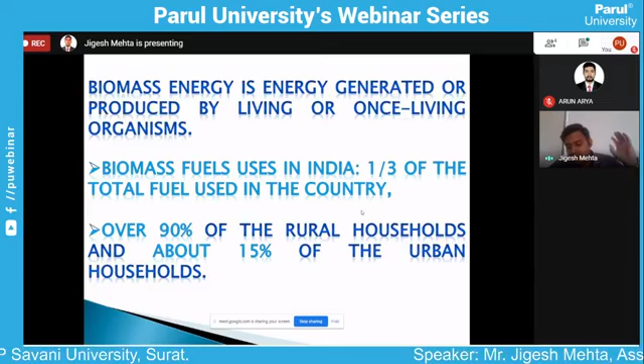This is the way the country or our government is trying to push alternative sources of energy. In India, only 1/3, or 35%, of total fuel is from biomass. Still, this number is very big. But we want to convert it into a 100% alternative fuel use country. Over 90% of rural households and about 50%, or actually about 15%, of urban households use biomass energy. So this is what the statistics currently say.

Now let us define, students, what is biomass. Till now what we discussed was just information or some statistical data. But now we want to know actually what biomass is, because some students from second year or third year may not have even heard this term before.

Biomass is a material derived from plants that use sunlight to grow, which includes plants and animal materials such as wood from forest, materials left out from agriculture and forestry processes, and organic, industrial, human and animal waste. So basically biomass is material derived from nature - the waste or residue of animals and plants, the left-out material of agriculture, the left-out material of forest products, even human and animal waste. If we put all this together as raw material for some source of energy, we call it biomass.

Biomass can be considered a renewable energy source because plant life renews and regenerates itself every year, as in the example of grass - if you cut the grass, after some period of time the same grass will grow again. So it is a natural process. The raw material is available freely in nature; you just have to utilize it and produce some useful product from that.

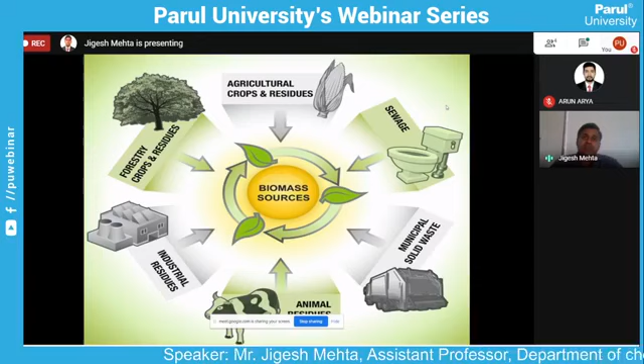Now, biomass sources - how biomass comes from nature, as we already discussed. You can see, agriculture crops and residue are a source of biomass. Forest crops and residue also provide biomass. Industrial residue, from the industry point of view or industry waste, sometimes gives biomass sources. Even animal waste, like cow dung, is a good source of biomass. Then municipal solid waste and sewage waste. So this diagram gives us an idea that biomass sources are available everywhere in nature. It is us human beings, or specifically we chemical engineers, who need to focus and try to utilize these sources for manufacturing renewable sources or fuels from them.

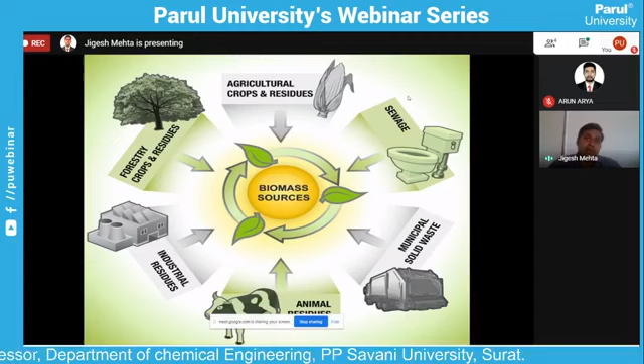Now the energy, sometimes we call bioenergy. The energy content in the biomass originally comes from the sun. Through photosynthesis, carbon dioxide in the air is transformed into carbon containing molecules that we call sugar, starch or cellulose in the plants.

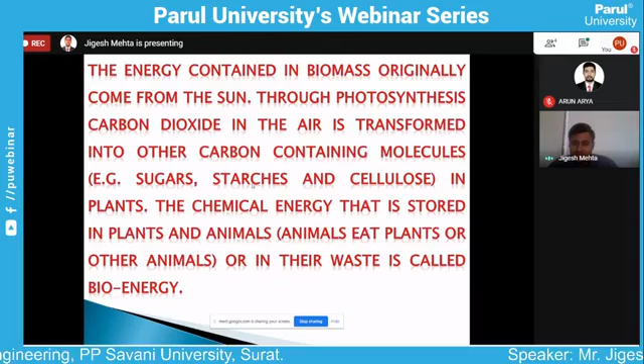Students, please note that whatever cellulose, hemicellulose, lignin, starch, all these chemical compositions available in the biomass, the only source is the sun. Through photosynthesis, carbon dioxide is getting transferred into various carbon containing sources. So it is not some rocket science that biomass contains all these things. It is actually the natural product available with the help of sunlight. Photosynthesis process goes on and the carbon dioxide present in the air gets converted into important sources required for the production of further bioproducts.

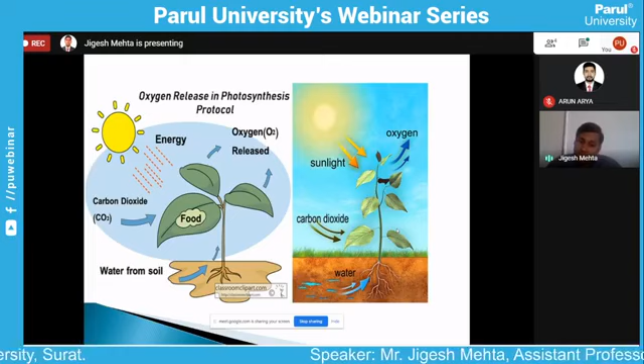What we discussed right now, this is just a schematic diagram for that. You can see the sun is there, providing some energy. Whatever carbon dioxide is available in the air, converts the material into various sources. You can see the uptake and intake of carbon and oxygen from this plant. Oxygen is released in the photosynthesis protocol. So carbon dioxide is taken in by the living trees or some crops, and it generates oxygen back outside. So this is the schematic diagram for that.

Now let us discuss more on the source of biomass, because you are all second year, third year and final year students, and probably in the next one year you will be searching for your projects. So if you know the source of biomass, you can easily start your project work.

Let's say wood from natural forest or woodland. So wood is one source. Forestry plantation, forestry residue - even the residue generated in the forest is also a source of biomass. Agriculture residues such as straw, stover, cane trash, and agriculture waste. We all know whenever we crush sugar cane, molasses is formed. So this molasses is also one source of biomass. Agriculture industrial waste such as sugarcane bagasse - that is sugarcane bagasse and rice husk. Animal waste, industrial waste such as black liquor from paper manufacturing, sewage, municipal waste, food processing waste.

This is all well-known terms, students, you all know, and these can be the source for the manufacturing of very useful products. These are what we call the source of biomass, which is available in nature free of cost. It is available free of cost, students.

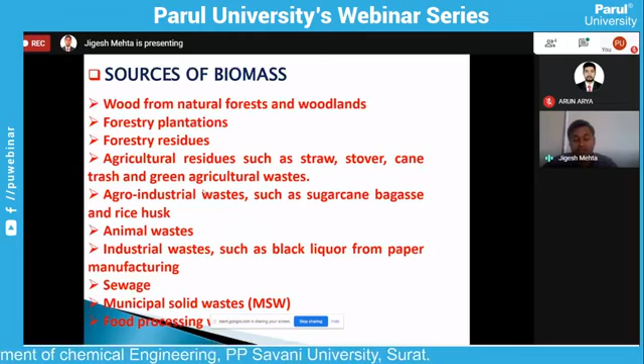Let us categorize field and plantation biomass. Let's say agriculture crop residue - cobs, stalks, straw, cane trashes, etc. are called agriculture crop. Whenever some agriculture land is there, when they produce some product, obviously there is some type of residue or byproduct coming out. So that can be the source. Normally farmers throw this waste or utilize it for cattle feeding or some other purposes, but this is also one of the sources for biomass.

Edible matters from crops - environmentally spoiled grains, pulse, fruits, nuts, spices, seeds, and lint. So there are also some types of fruits and nuts and all these things available in nature, which can be a further source.

Dedicated energy crop - bamboo. Why do I focus on bamboo? Because initially when there was discussion on biomass, bamboo was the first tree or source of biomass which was recognized, and a lot of work is done on bamboo.

Plantation debris - leaves, bark and trunks. Even you see there are some leaves which have just fallen down from trees, or some barks or some trunks. So these are some plantation debris which are actually waste, that can be the source of biomass.

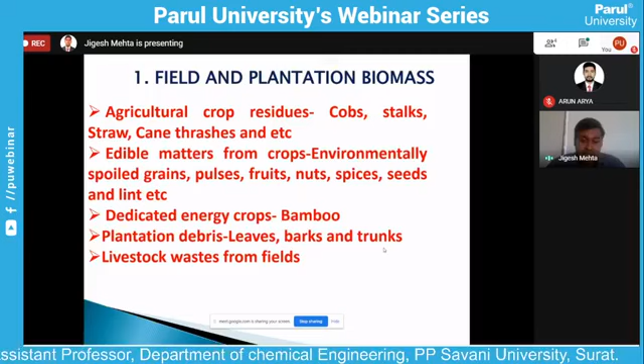Livestock waste from the field. Even from the field you can have the livestock, that is a waste product.

Urban waste biomasses means it is the municipal solid waste. We all know there is a lot of solid waste which is generated in the municipalities, and whatever waste is coming is actually being thrown out or being utilized for some other purposes which are actually not environmental friendly.

So we should utilize this solid waste as a source of biomass for some useful products. Sewage sludge is also generated in huge quantity due to industrialization, and this huge quantity is creating a land pollution problem.

Thirdly, kitchen and canteen waste. Every institute, every industry, every home has some kitchen or canteen, and whenever there is a kitchen or canteen, some amount of waste is generated for sure. So you can imagine this is also one source of biomass, which can be utilized as a raw material to produce a lot of things.

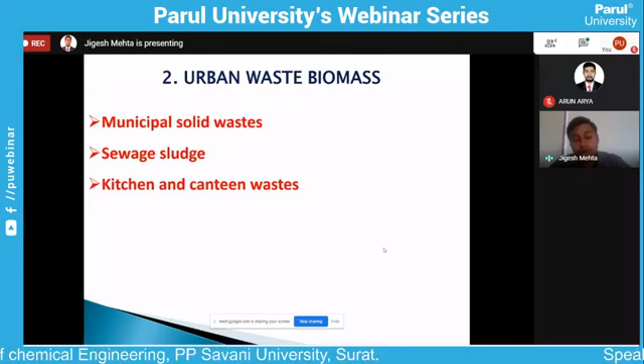Industrial biomass: what are the industrial biomasses? Agro-industrial process biomass and their waste, such as herbs, oil cake, sugar molasses, hides and skin waste, fruit and pulp debris, saw dust, wood pulp and paper, fermentation waste. These are some industrial wastes coming out that can be a source of biomass.

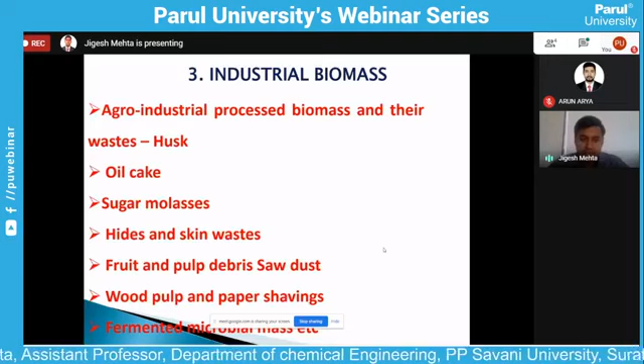Forest biomass: log residues, timbers, forest floor debris, animal carcass. These are some of the forest biomass that you can collect from the forest.

Aquatic biomass includes seaweeds, for example kelp, which is available mostly in oceans. This is called seaweed. Then there's freshwater weeds, dead fishes, and microalgae blooms. These are some aquatic biomass sources.

Even aquatic animals are acting as a very good source of adsorbent. Some project work we are doing right now here at our university involves using parts of aquatic animals as a very good adsorbent in effluent treatment plants. So a lot of biomass sources are available in the aquatic domain also.

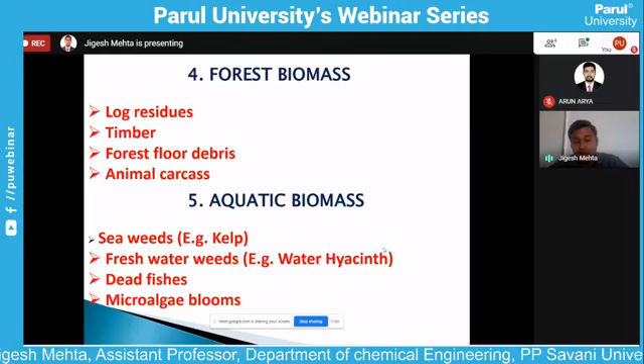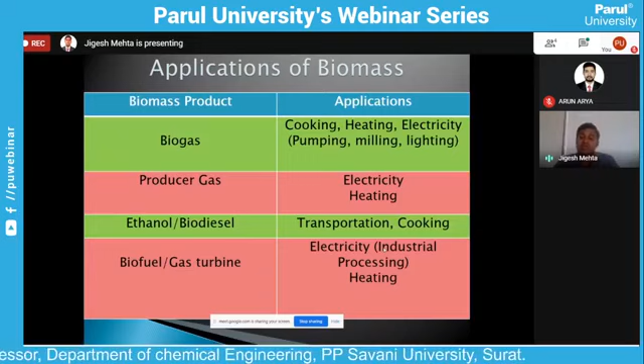Now, talking about current applications of biomass: the products include biogas, producer gas, ethanol or biodiesel, biofuel, or gas turbines. Biogas plants are available nowadays and are used for cooking, heating, and electricity purposes. Producer gas is used for electricity and heating purposes. Ethanol or biodiesel is used for transportation and cooking. Biofuel or gas turbines are used for electricity, industrial processing, or heating.

So students, till now we discussed the sources of biomass, its availability, chemical composition, and its impact on nature's ecology. Now we want to discuss biomass energy, meaning what types of energy you can generate using biomass as a source. This presentation is really important, especially for third year students, since in final year many of you will focus on projects related to biomass. This is the cycle of biomass, very simple.

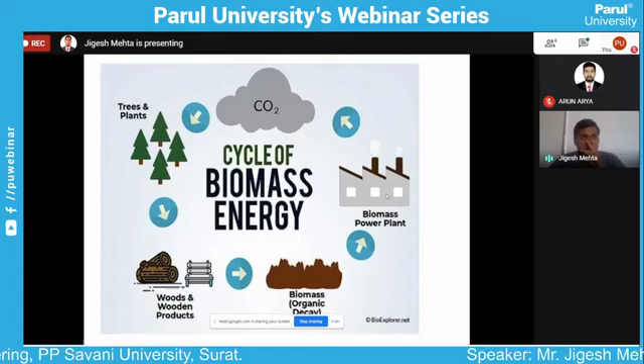Carbon dioxide is hazardous to the environment, but it is also an important component of biomass energy. Carbon dioxide is taken up by trees and plants, which are converted into products like wooden products. When these wooden products stay for many years, say 100 or 200 years, and decay, they become biomass, which is then taken to power plants, and from the power plants carbon dioxide is generated again. So students, it's our wrong mentality that carbon dioxide only gives harmful effects—on the other hand, it is also an important component in the biomass energy cycle. Without carbon dioxide, trees cannot uptake it, and the further processes will not happen, so it is also an important component.

Now this is one of the important slides of my presentation, because this is the point you will all be focusing on in the future: biomass conversion. Let's discuss how to convert the biomass—for example, if you take sugarcane bagasse, which is available after some process.

So are you going to go for the direct combustion of bagasse? Are you going to do the thermochemical conversion, or are you going to do the biochemical conversion? You need to decide whether your conversion will be in which form.

If we talk about direct combustion, it is directly done. Second is the thermochemical conversion, where it is divided into two major parts, which is the most favorite research part, especially in India.

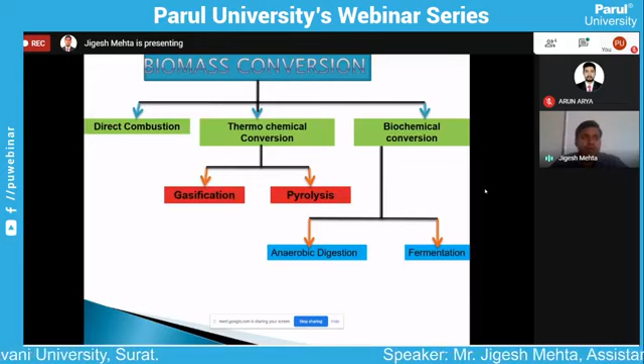In India, let me tell you a fact: people do not work much on softwares, here people work on synthesis processes. The laboratory work is a lot in India. So gasification and pyrolysis are important topics where people are working a lot. Many papers have been published, and still people are working. It is an unending topic where you can work.

And finally the biochemical conversion, so it is anaerobic digestion or fermentation. So we need to decide which type of biomass conversion we need to go for. Now we will discuss one by one all these types.

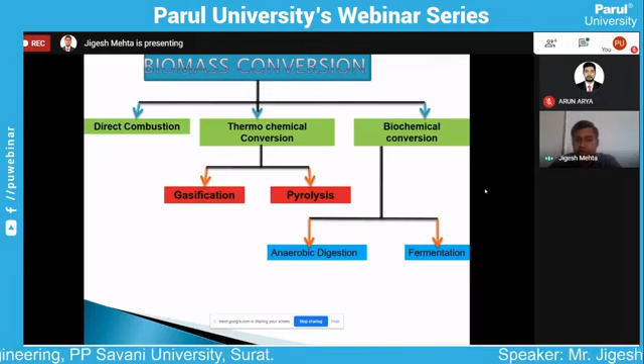So direct combustion, students. The simple and most common way of extracting energy from the biomass is direct combustion of solid matter. For example, as I discussed, let us take the sugarcane bagasse.

Ganna, when you crush the sugarcane, we all must have enjoyed the sugarcane juice available on the road. You can see there the sugarcane is being crushed, and after crushing the waste sugarcane is thrown. That thrown material is the biomass, students. You can collect that and do a lot of research work on that.

If we do a simple calculation of direct combustion, it is the direct burning of solid material. While burning, you generate a lot of energy. The first energy you can generate is electricity. Power plants that burn garbage for energy are called waste to energy plants.

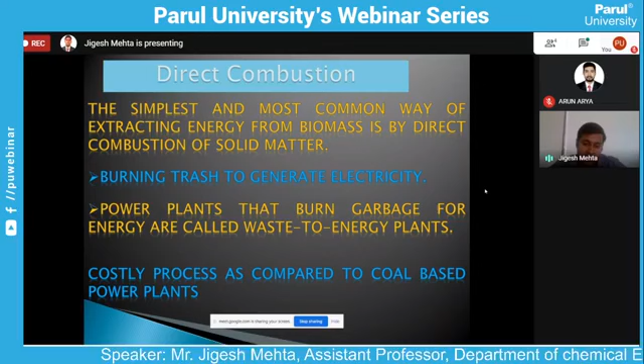These are costly processes compared to coal-based power plants. Obviously, these power plants work at a higher cost compared to coal-based plants, because when we talk about these power plants, they work on electricity, while coal plants work on coal, and coal is available, but electricity we need to generate.

The complete combustion of biomass into ash is called incineration. I hope you must have come across this word, incineration. Actually, incineration is simple combustion of biomass into ash - you are converting the biomass into ash.

The heat energy in the product gases or in the form of steam can be used for various applications like space heating or cooling, power generation, process heating in industries, or co-generation with conventional fuels. So the heat energy is formed in the form of steam. In industry you must have learned that boilers are used for generation of steam. So the heat energy given in the boiler converts the energy into steam, and that is applied for various applications.

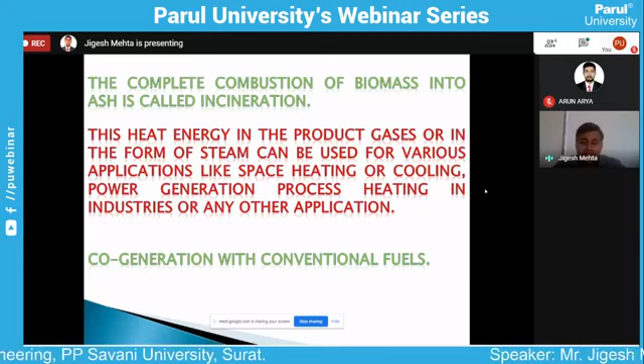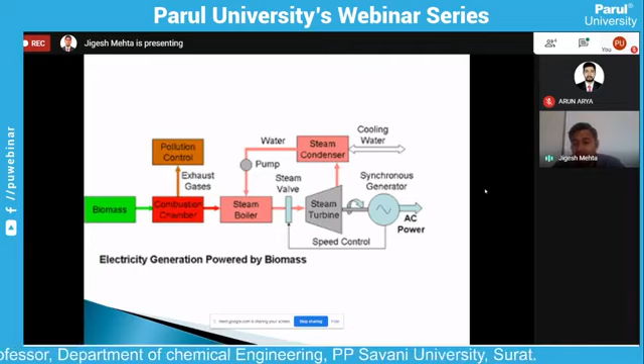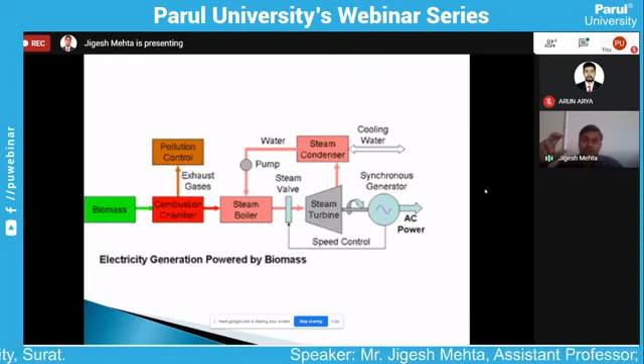This is a small slide with a picture I have kept, it is blurred but you can understand - electricity generation powered by biomass. The biomass is available, and with the help of it you go for direct combustion. With the help of combustion you generate steam, and from the steam you run the turbine, you run the condensers, and you generate a lot of AC power, or electricity, from the turbine. This is also one of the good projects you can take up, by taking different biomasses as raw material, and you can generate electricity.

So thermochemical conversion, students, is divided into two parts: gasification and pyrolysis. Thermochemical reactions can convert organic matter or mass into valuable and convenient forms of product as gaseous and liquid fuels, residues and byproducts. Basically, thermochemical conversion is converting the biomass into three different states: solid, liquid and gas.

Through this process, you are able to get the solid material, the liquid material, and the gaseous product also. This is the beauty of this type of process - if you go for gasification or pyrolysis, you are able to get three states of product, and that can be utilized for different purposes.

So through one process you are producing three different states, and all these states are used for different applications.

So let us discuss gasification. Gasification is a process that exposes a solid fuel to high temperature and limited oxygen to produce gases. Its main objective is to produce a gaseous fuel, so there is limited oxygen available and the temperature should be high. If your temperature is high and you are providing a limited amount of oxygen, you are doing the gasification process. It is a mixture of gases.

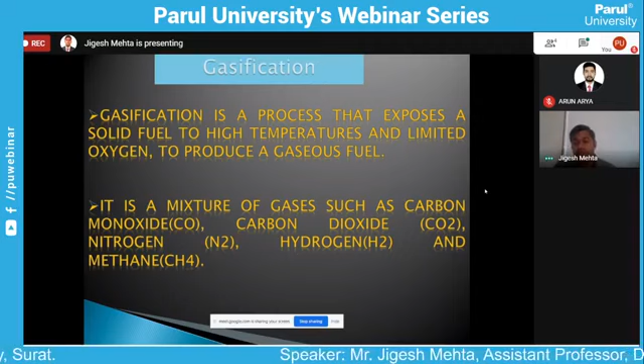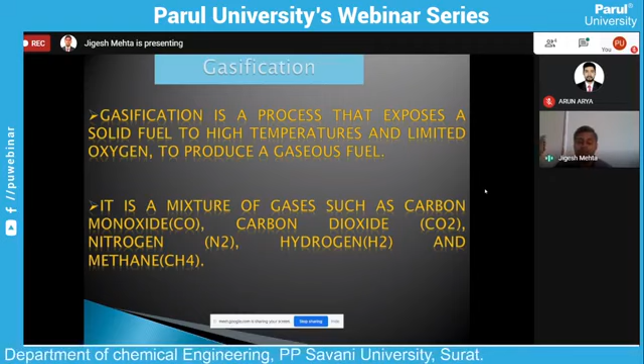Just imagine the scope and perspective of today's topic, biomass. You can produce industrial gases, which are widely used in all the chemical sectors. If you go to any industry, nitrogen is always used for blanketing or as an inert gas. So this is what gasification is.

The resultant gas, methane, can be treated in a similar way as natural gas and used as a fuel. Methane is also one of the important products here; it is used as a natural gas and nowadays is highly used as a fuel. It even produces a fuel that has many impurities removed and will therefore cause fewer pollution problems when burned. So for methane, it produces a fuel with very minor impurities.

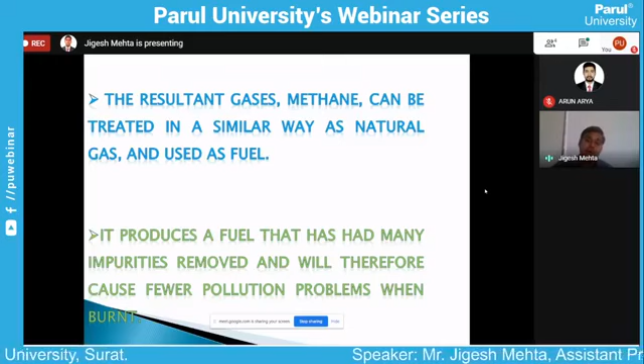So these are the scopes of biomass. From biomass you can prepare a lot of things. Now this is one important technology I want to discuss, called plasma gasification.

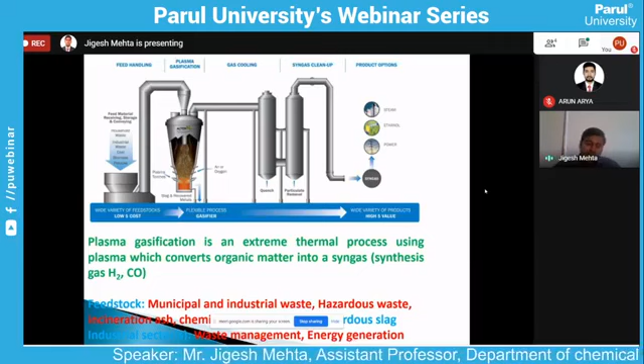Now what is the feedstock? Municipal and industrial waste, hazardous waste, incineration ash, hazardous slag, and waste management. So these are the scopes, or we can say the feedstock, for gasification, available in nature.

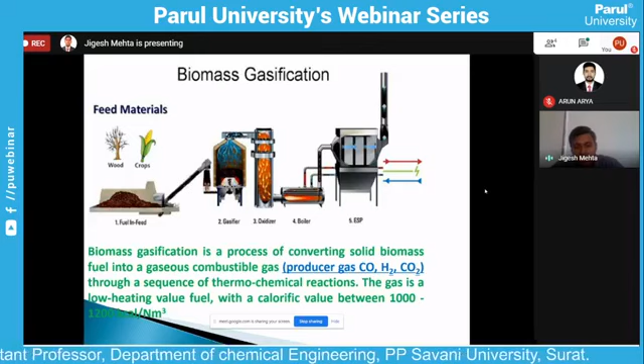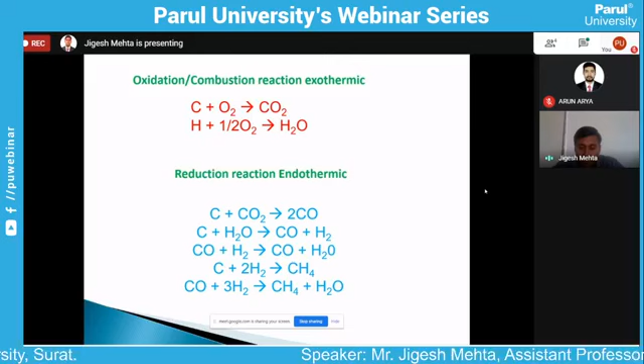Now this is the basic reaction, how it takes place in gasification. Carbon plus oxygen gives carbon dioxide, very easy. Then hydrogen plus oxygen gives water. Then for the reduction reaction, you are breaking down the carbon dioxide: C plus CO2 gives 2CO, C plus H2O gives CO plus H2. So a further chain of reactions takes place during the gasification of any biomass. In each reaction you are producing carbon monoxide, water, hydrogen, or methane. These are the basic reactions you should understand when studying biomass combustion.

Next is pyrolysis. So what is this pyrolysis? It is a very innovative heating technique for biomass, done in a closed vessel at a temperature ranging from 400 to 900 or 1000 degrees Celsius, in the absence of air or oxygen. It produces three states of product: solid, liquid and gas.

The pyrolysis process can also use all types of organic matter, including plastic and rubber. Nowadays a lot of people are using plastic and rubber as raw material for producing various organic matters through the pyrolysis process.

The products of biomass pyrolysis include biochar, bio-oil and gases. As I told you, there are three states: solid, liquid and gas. The solid is called biochar, the liquid is called bio-oil, and the gas is called biogas, which includes methane, hydrogen, carbon monoxide and carbon dioxide. So this is all about pyrolysis.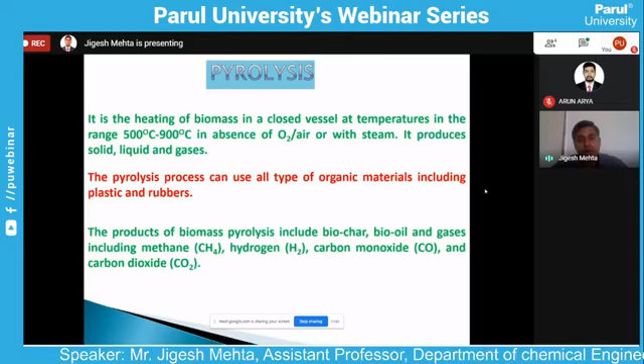So how does the process look? If you have the biomass, students, you can go for drying. Let me give you a small idea for doing a project. I know there's a problem of resources in the laboratory, but there is usually some dryer or heater available, and some grinding machine or crusher available. You can prepare your own pyrolysis reactor and then go for the process.

I guarantee you, students, you can use any biomass. If you go for drying, then grinding, and then use a small reactor, you can easily prepare biochar, bio-oil and biofuel from biomass very easily, in the laboratory itself.

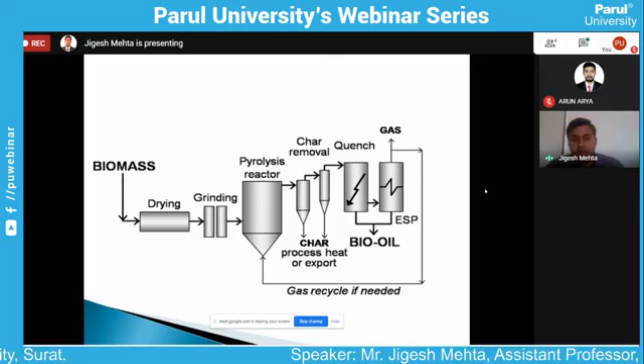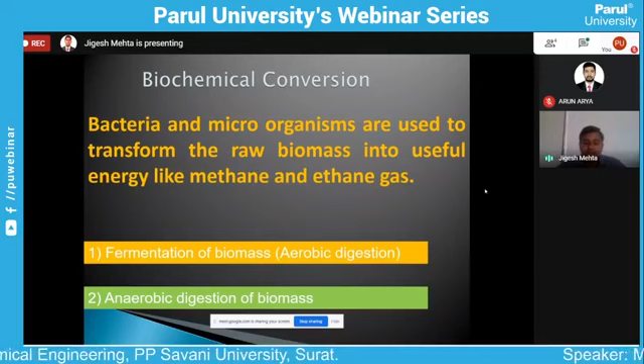Now the last part is biochemical conversion — how to convert biomass into useful products using biological organisms, like bacteria and microorganisms. These are used to transform organic biomass into useful energy, through fermentation, aerobic digestion, and anaerobic digestion, which happens in the absence of oxygen.

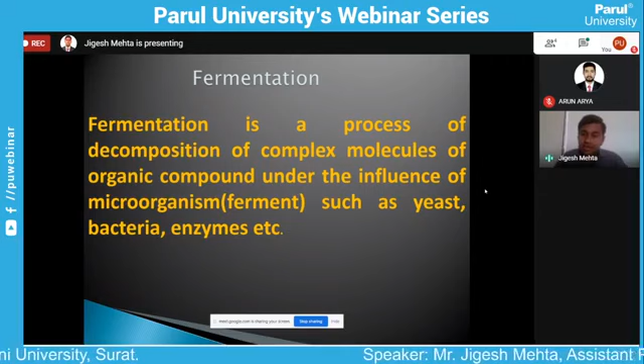So what is fermentation? Fermentation is a process of breakdown of complex molecules of organic compounds under the influence of microorganisms such as yeast, bacteria and enzymes. You are dividing the complex molecules using bacteria, yeast and enzymes, utilizing oxygen in the presence of organisms, breaking components into simpler forms.

For example, the conversion of grains and sugar crops into ethanol and CO2 in the presence of yeast. We all know we can convert sugar into ethanol and carbon dioxide gas in the presence of yeast.

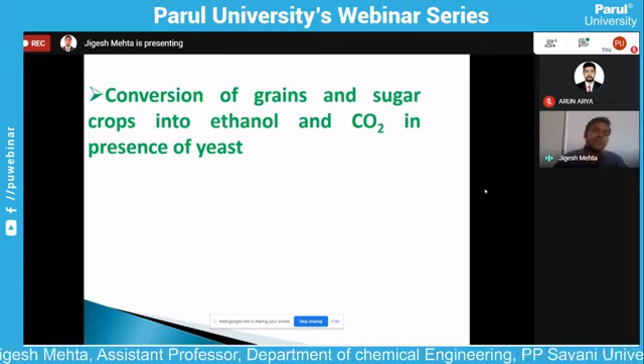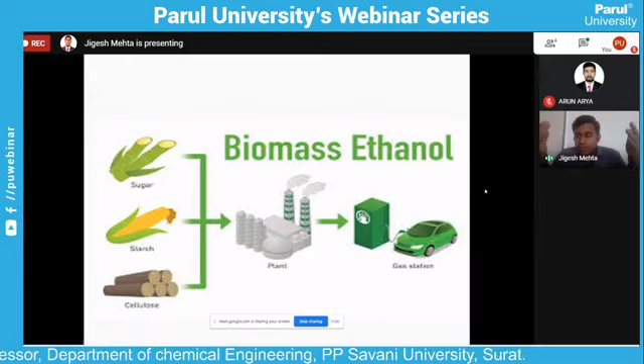Biomass is used nowadays, as I gave the example, Namo biodiesel. Namo biodiesel stands are available everywhere on the highway. That is also one of the best examples of biomass ethanol — using biomass you prepare ethanol, or biodiesel, which is used nowadays as a transportation fuel in most cars. In a few years, I guarantee biodiesel and other biofuels, which I'll discuss in later slides, will become a big source in the future that replaces petrol and diesel.

Last is anaerobic digestion. The anaerobic digestion or anaerobic fermentation process involves converting decaying wet biomass and animal waste into biogas through decomposition by the action of bacteria. Anaerobic digestion means, in the absence of air or oxygen, you convert animal or plant waste into some useful product.

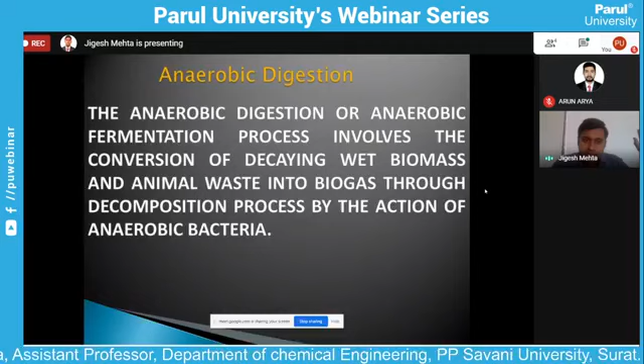The most useful biomass for production of biogas is animal and human waste. Waste generated by mankind and animals is the most important source of biogas. Many kitchens and canteens nowadays have biogas plants — even our university canteen has one. Whatever waste is generated every day is put into it, and we generate biogas from plant residue and other organic waste materials with high moisture content.

So at the end, students, what are the advantages of biomass? We discussed a lot about the biomass sources, biomass utilization, and how biomass is converted into various products. What are the methods of converting biomass? But now, after doing all these things, what advantage are we going to give to the society or the environment is very important to understand.

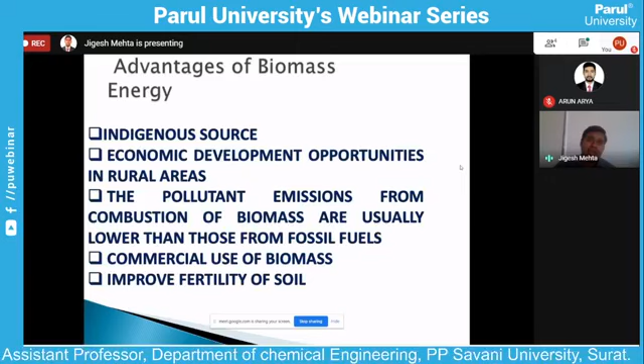And last is improved fertility of the soil. Biomass is very good actually to the land. It is not degrading any land quality, so it is improving the fertility.

Environmental advantages: obviously it's a renewable source, reducing the landfills, protects clean water supply, reduces acid rain and smoke. Obviously, if you are producing less pollution, the acid rain and smoke will be less. It generates less greenhouse gases.

Obviously, students, when there is some advantage, there is always some type of disadvantage we need to bear. So first, it is dispersed and land intensive as a source. It is highly available and occupies most of the land, so that is a disadvantage.

It is having a low energy density, meaning conversion of biomass into the product is somewhat less. It is not having a yield of 90%, 95%. That's why the energy density consideration is lesser in case of biomass.

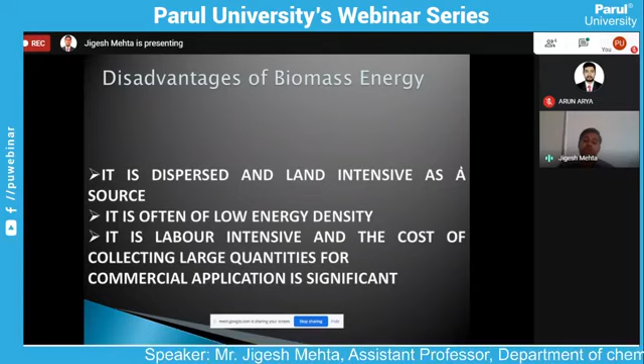It is labor intensive, and the cost of collecting large quantities for commercial application is significant. You have to collect the biomass from nature, so you require manpower or machinery to cut the biomass and collect it. For example, sugarcane molasses is generated in tons every day, but how to collect that, how to separate it, how to carry it - that is a big question because it is available in very huge quantity.

Other applications: activated carbon, as I gave the example. It can be used in wastewater treatment as an adsorbent or filter, made from biomass. It can even be used as a catalyst or catalyst support. It is used for storage material and for mesoporous carbon, playing an important role as a catalyst. It is used as a source for biodiesel, which is one of the important liquid fuels.

Biodiesel is produced from vegetable oil and animal fat with alcohol and catalyst through trans-esterification reaction.

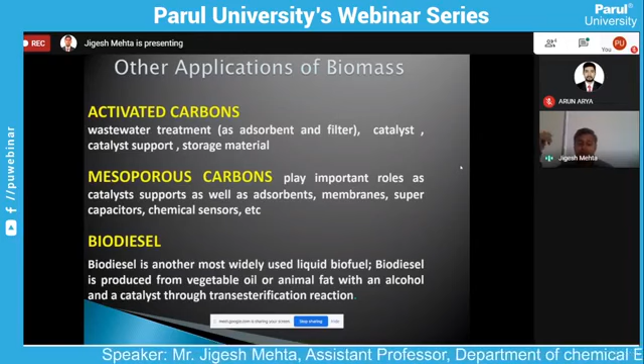Sugar and alcohol, sugar, glycerin, furfural, cellulose and its derivatives, carbonaceous material, resin, bioplastic - these are all the sources which are available in biomass. When you extract the biomass or go for treatment of the biomass, these are some of the components which come out from the material.

This is what I want to give you, students. Actually, my presentation is done, but still these 2 to 3 slides will give you some important research work right now which we are doing in our laboratory, and I want you all to focus on this too.

There is what we call lignocellulose biomass, the foundation of the second generation biofuel. Now, the waste of the trees, harvest, timber industries, food and animal - as I told you, grass is available abundantly. Now, if grass is available abundantly in the market, what will happen?

The grass you can cut and use as biomass, and it can be used to produce one of the important products, that is 5-HMF, 5-hydroxymethylfurfural, which is found to be an intermediate for one of the important biofuels that I am going to discuss, students.

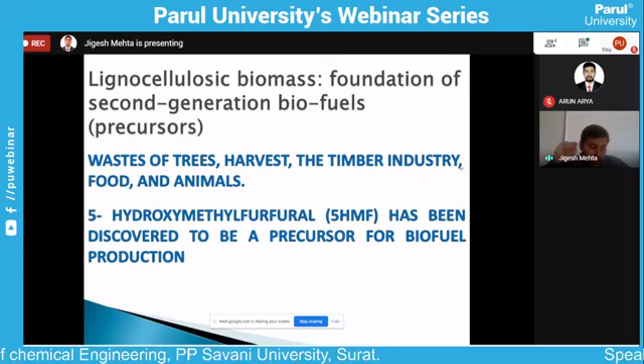5-HMF is used to produce DMF, which is a biofuel with characteristics similar to petrol and other high fuel chemicals.

As I told you, fossil fuels - petrol, diesel and kerosene - are going to be exhausted, but there is some new type of source which is going to come. Electrical vehicles are not going to absorb the whole market. There will be some source of energy which has to come, and I hope this DMF will be the future scope of biopetrol, which is going to come in the near future.

I'm happy to share that my students and some researchers are doing research work on this DMF, and I suggest all of you, if you spare some time, search for research papers on 5-HMF and DMF production, which is a breakthrough right now in the field of biofuels.

So this is what the small flow sheet means. From the cellulose, or from biomass, you have to produce HMF, and from the HMF you produce a lot of these products. In these 12 products, you can see the first one below is 2,5-dimethylfuran. You can produce this as a product, and it is a biopetrol. These are the various derivatives which come from HMF, and number 6 is our product, dimethylfuran.

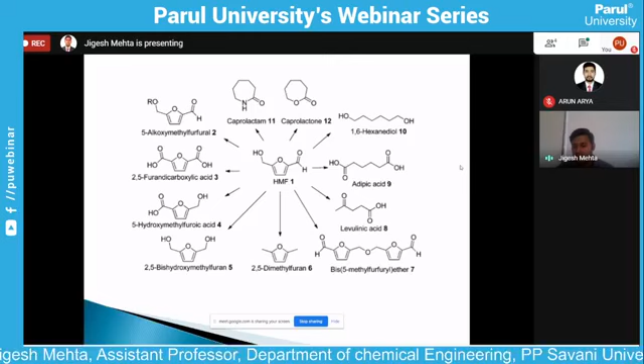Yes, so this is my last slide, students, biomass. How is biomass going to contribute to society or the environment? It is used for gasification where syngas can be produced. It can be used in carbonization reactions for high quality char.

It can go for various chemicals, phenols, diols and food additives. It can go for slow and fast pyrolysis where you can produce biofuels and bio-oils. It can go for hydropyrolysis where you can produce various chemicals. It can go for liquefaction where energy in the form of heat and power can be produced. It can also go for simple direct combustion, that is incineration, where you can produce heat and power energy.

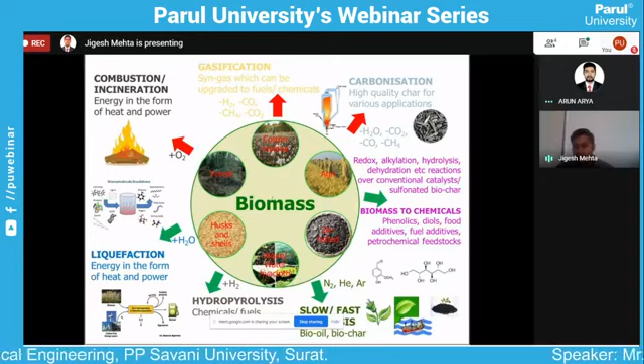So students, you can see at the bottom: agriculture, algae, husk, forest, cotton — these are all sources which are nearby to us, and still we are looking for more sources. So please come up, students, take up projects, do some research work in the field of biomass, because this is an unending topic. There is no end to it. You will be tired doing the projects or research in this field, but the topic will never be over.

So thank you from my side. This is what I have shared today, and I hope you must have enjoyed this slide.

Thank you so much, sir. Thank you, Arun sir. Actually, there are some students who shared their problems.

First problem: is it feasible to use biomass energy at large scale, meaning economically and efficiently? Can we use this at large scale? Yes, Arun sir, even just a month before I was in some webinar, and there was an expert, and I asked the same question to them, and I got an answer that yes, biomass can be used in huge quantity, and commercially also. But the problem is this is the disadvantage nowadays.

It is actually generated in a very huge quantity. Let's say, for example, sugarcane molasses, or elephant grass, or coconut waste, or rice waste. These are all waste actually, but it is biomass. But it is generated in such a huge quantity that we should develop processes which can accumulate all this biomass and generate some useful products from it.